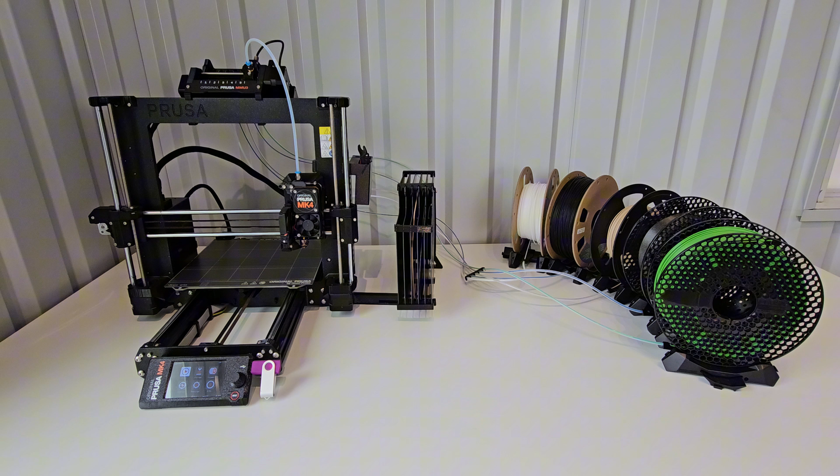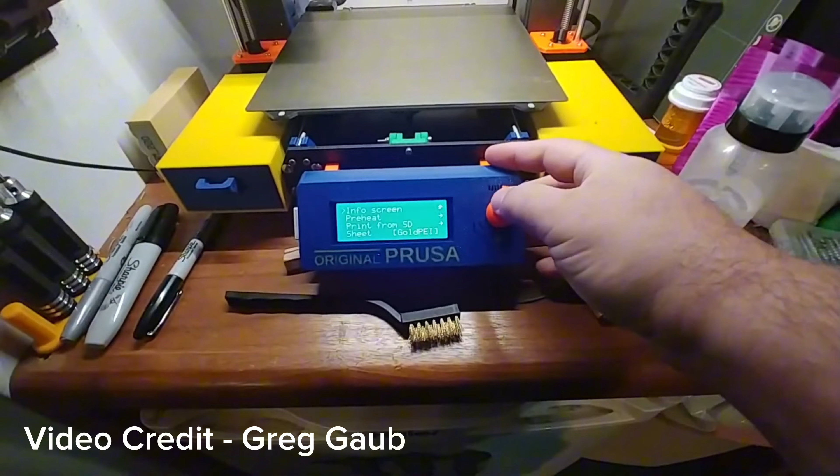Today I'll show you how I went from the gigantic footprint of the stock MMU3 to a much more compact design that's also a lot easier to load, by placing the spools above and having a different kind of filament bank behind. A subscriber sent a link to a YouTube video showing this setup for an MMU2, and I decided it would work similarly for an MMU3. I wanted to try this since it's easier to load, and I won't have to worry about spring-loaded retract spool holders.

The original design is on Thingiverse by TN Dave, and most of the parts are printable. There is also going to be some hardware required.

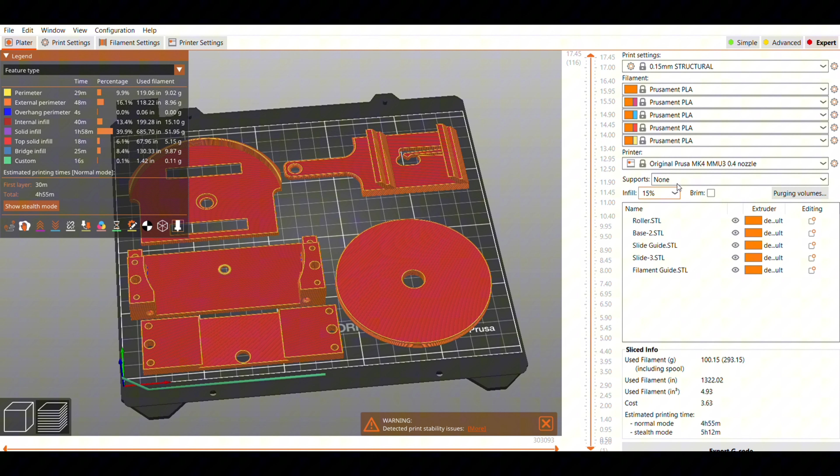So I downloaded all of the parts and arranged them as he recommended. Most pieces can be printed on one build plate at once, so I ran this on my MMU3 to upgrade my MMU3, and as he recommended, I did 15% infill with gyroid pattern. I'll have to print 5 of these, and they're a little under 5 hours each.

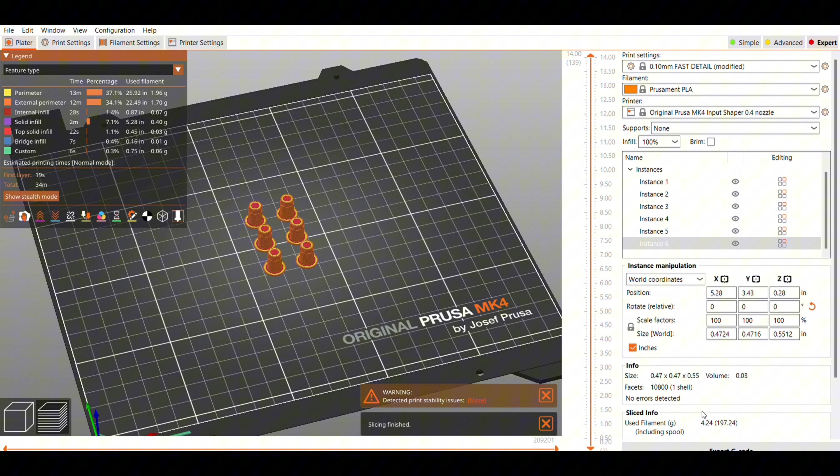There's also a filament guide, which I printed all 5 at once, and the bearing retainer, which he recommends printing at 100% infill. Of course he was running this on an MK3, so we'll see how it does on an MK4.

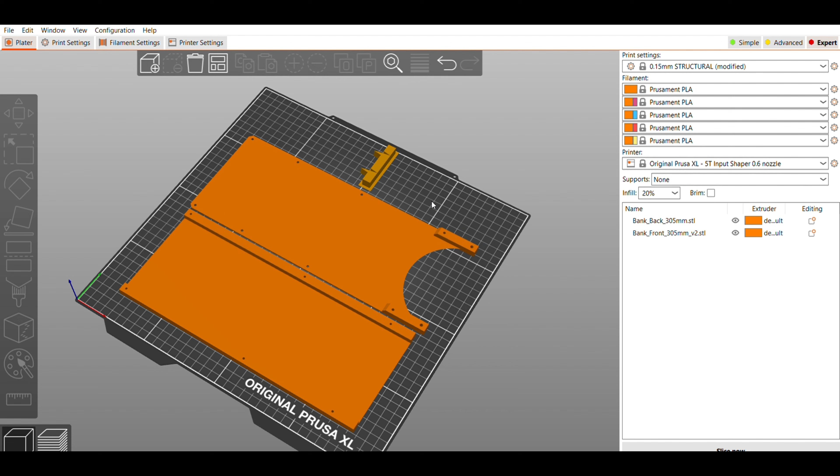There are several different sizes. I went with the largest size because with my Prusa XL, I'll be able to print it. If not, you can print the smaller size on your MK3 or 4, and the filament will just stick out the top a little bit, but there is room for that.

I was hoping I'd be able to print 3 parts at once on the XL, but after trying to arrange them, I realized I'm only going to be able to print 2 parts, so I printed the front and the back for each set.

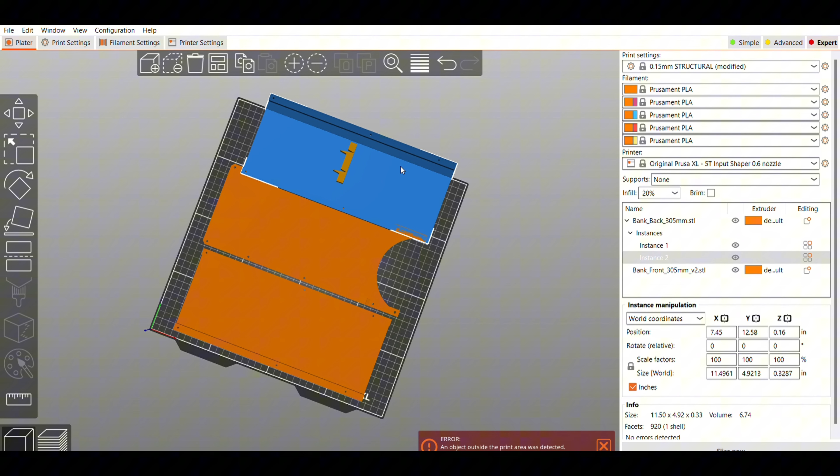This will take about 5 hours for each set as well, and I'm going to run the Prusament Galaxy Black for all the pieces, and I also have some Prusa recycled filament in a 2 kilogram spool.

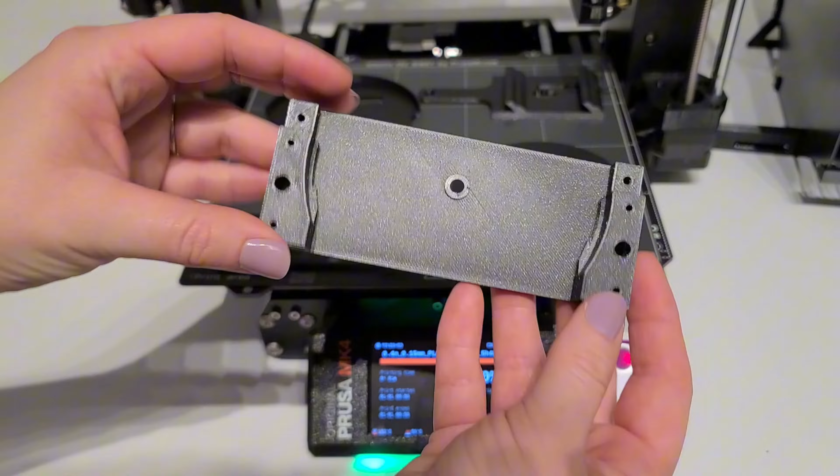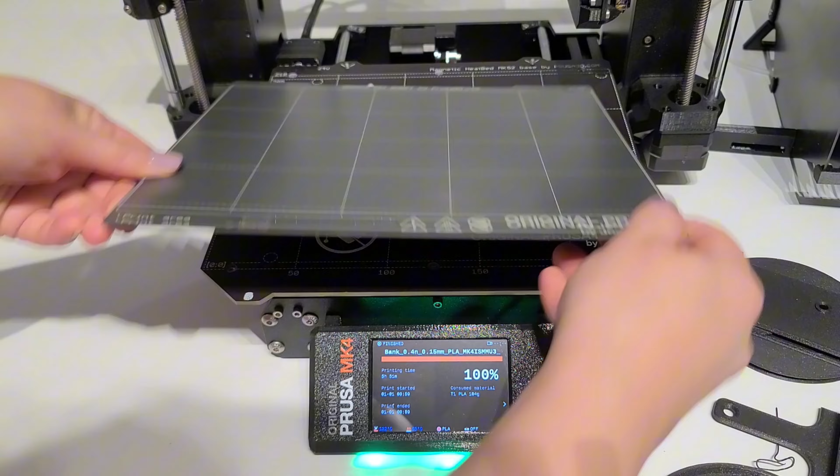The prints went fine on the MK4, all of these pieces here. I did think about printing on the XL, but I'm still running the 0.6 nozzle, so I was a little nervous the tolerances wouldn't be the same. So I just ran all of these on the MK4 over and over again.

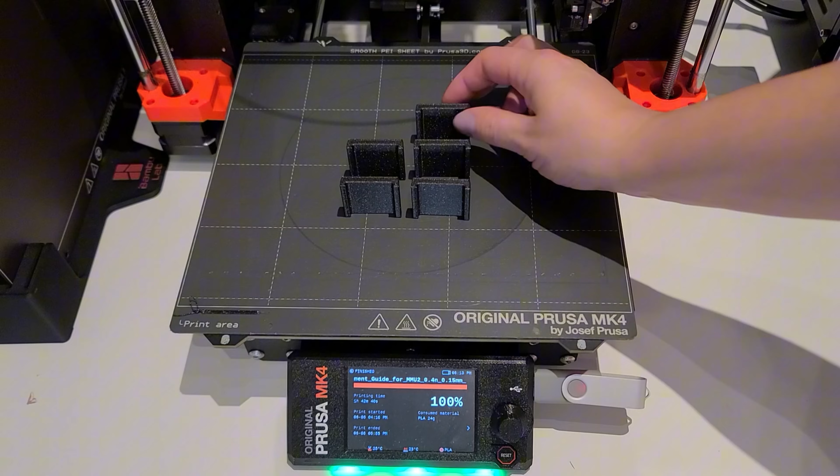But I am going to print the filament bank guide — that's the gigantic piece — on the XL, using this 2 kilogram of recycled filament. These pieces also printed quickly and completely fine in the Galaxy Black.

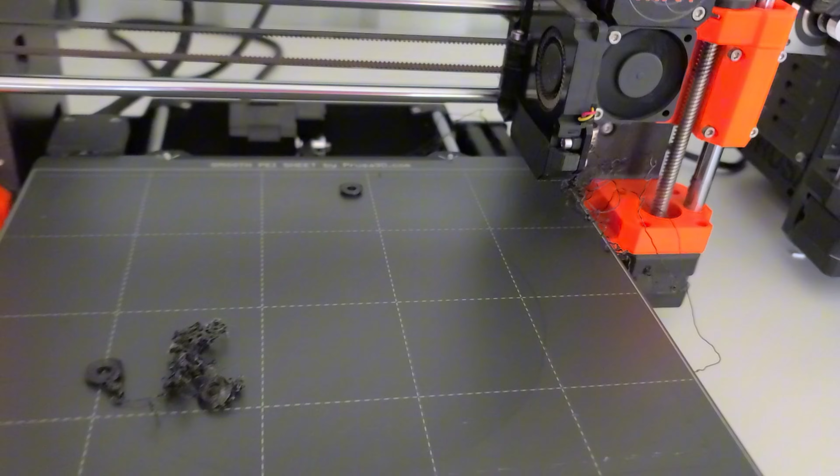But when I got to the bearing retainer, I had some issues. I printed with and without input shaper, and kept coming back to pieces not sticking to the bed, and a mess. So I decided to run it on the Bambu, and that finished out okay.

Okay, so I've got a big box of multiple things that I've ordered on Amazon for all the parts and pieces. Let me go through them one at a time.

So I've got the pan head self-tapping screws. This is an assortment. I did try to get everything in black because I printed everything in Galaxy Black, so I really wanted to see if I could get all the hardware black if possible.

I have 3 sets of the pneumatic push connectors. These are going to attach the tube for the filament on 2 sides, so I needed at least 10. I was feeling like I might need more, so I went ahead and got 3 packages of them.

Then I've got a large assortment of flat head screws. The other ones were self-tapping, these are not. So, screws, bolts, kit.

Okay, and then I needed some more drill bits. This one is a metric set, and this one is a center drill set. I think I just need one from each of those, but I wanted to make sure I had everything.

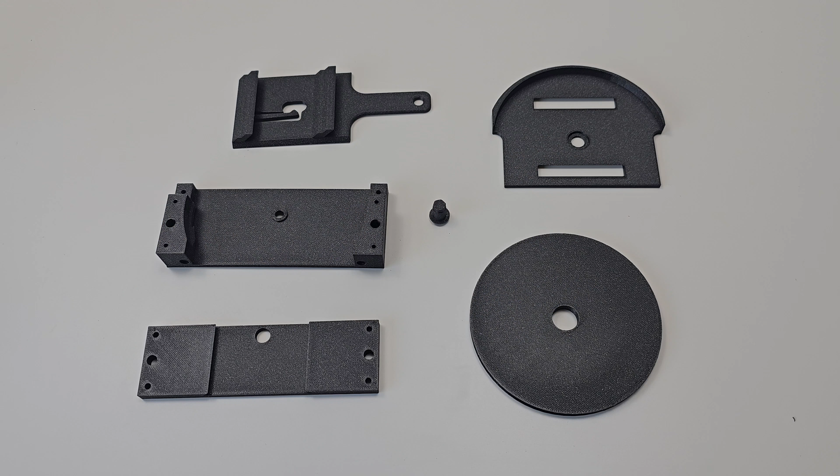And then the last thing that came in that I was waiting for forever is the ball bearings. I don't think that if I pulled apart the buffer these would be the right size, so I did order these as well just to make sure I had everything. I probably went overboard on all the different things I purchased, but I didn't want to be held up by not having the exact right size of screw or not having enough of them. So I wanted to be able to just knock this out quickly.

Okay, so we have one set ready. There's 5 pieces that I'll print on one build plate, and then the bearing retainer. All of those for one set.

The first step is to clean out the filament holes on this piece with a 2mm or number 47 drill. It says to be careful to keep straight with the printed hole, so it's going to be this and this. You can see through them a little bit, but there's almost like a little bit of a lip in there, so we need to clean that out so the filament can go through.

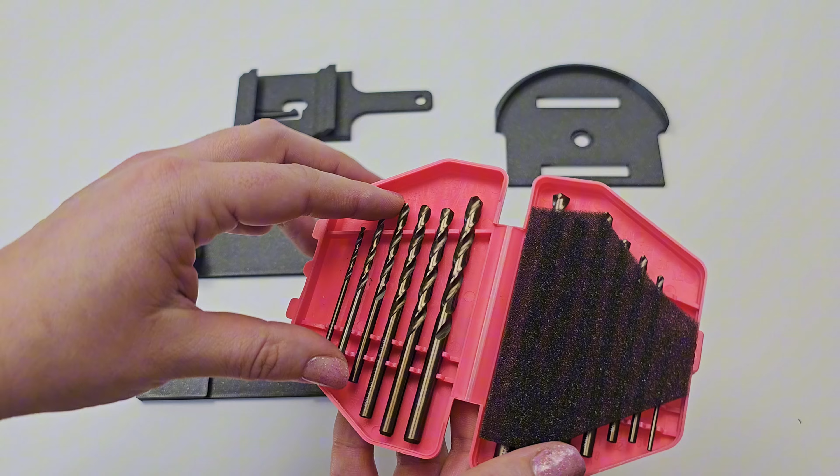So with my metric drill bits, I'm looking for the number 2. I think I'm going to take the smaller drill bit and see if I can clean it out a little bit that way.

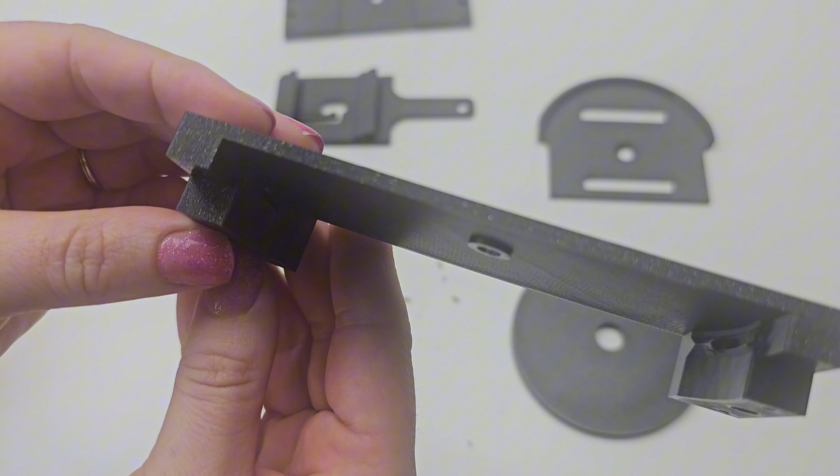I know that I am drilling a little bit through, maybe more than it seems like it should, but the filament does need to load all the way through there. So I'm going to grab filament and see if it will load.

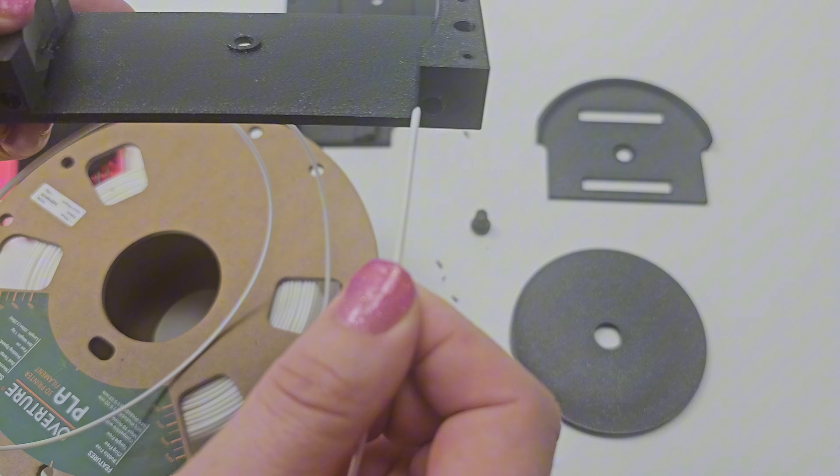Okay, that looks good, and this side too. I just want to make sure at this point that it goes through, because it's a little harder to drill these holes later.

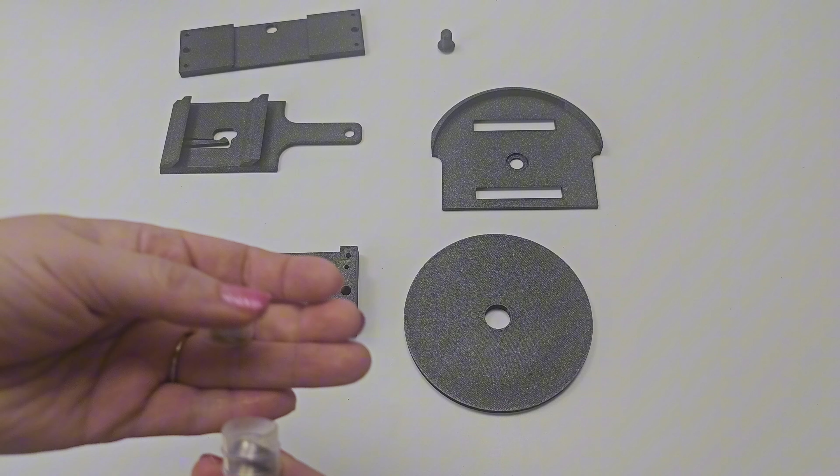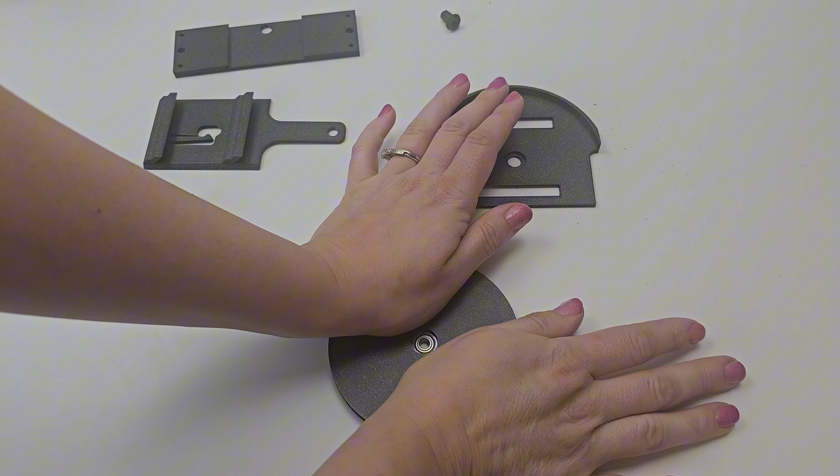So the next step is to take the roller and add the bearing into it. It is kind of tight, so I'm just going to really force it in there. And once I have it kind of jammed in smoothly, I can push it the rest of the way so that it's flush on both sides.

Okay, and then I'm going to take this and put it into here. Now there are some notches - from this side you'll see just a little bit of a triangular shape, and from this side there's actually 2 notches, one here and one here.

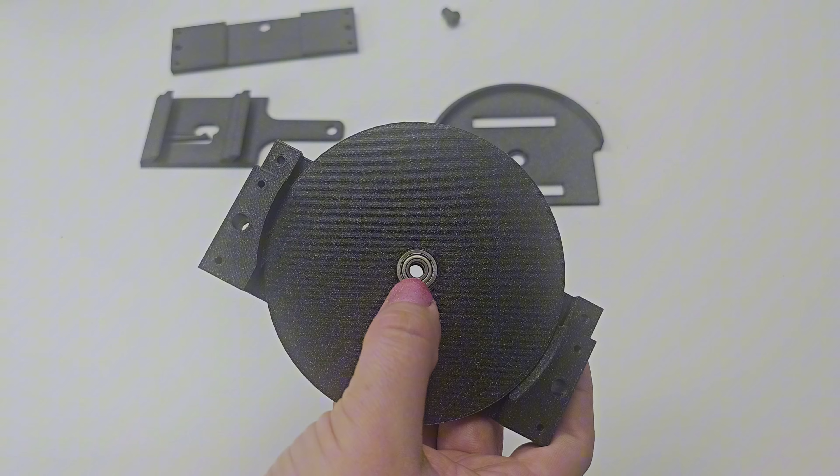You want to have both of them slide in between this opening. This is kind of raised, so you can use that as your guide, but you do need to get both sides to slip in. You can see on this side both of those are in, and both of those are in on this side. From this side, you can see that little triangle shape is inside. And of course we need to make sure it's slipped in enough that the opening is there.

Then we can set the bearing retainer here, and we need an M5 by 12 flathead screw. So in here, I've got M5 by 12, it's 3 over - 1, 2, 3. We just need 1.

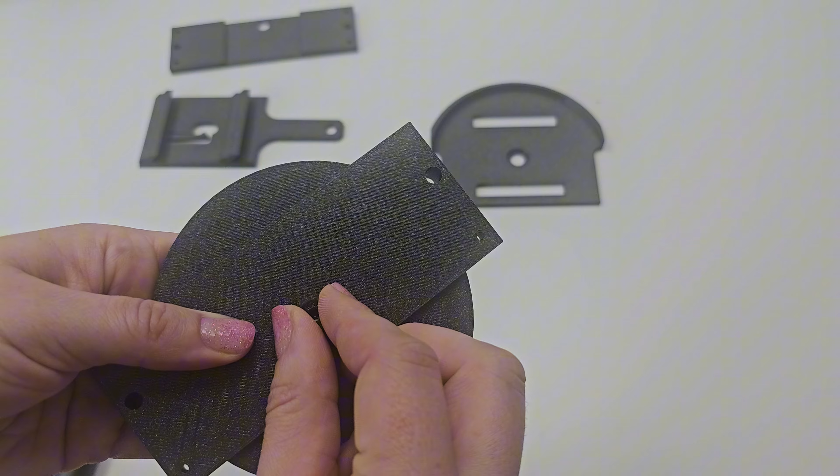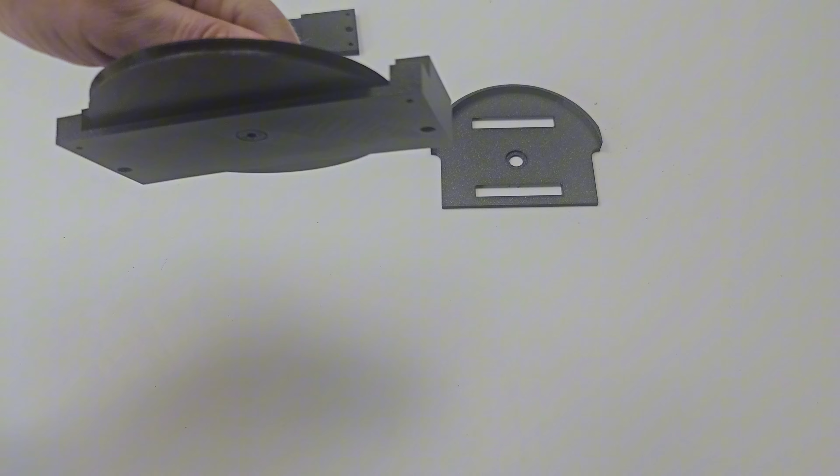Okay, and you can see from it spinning around that it spins easily. This needs to move freely, and you may have to just spin it a few times to get it to slide around how it needs. It works its way in there a little bit, but now it's moving freely.

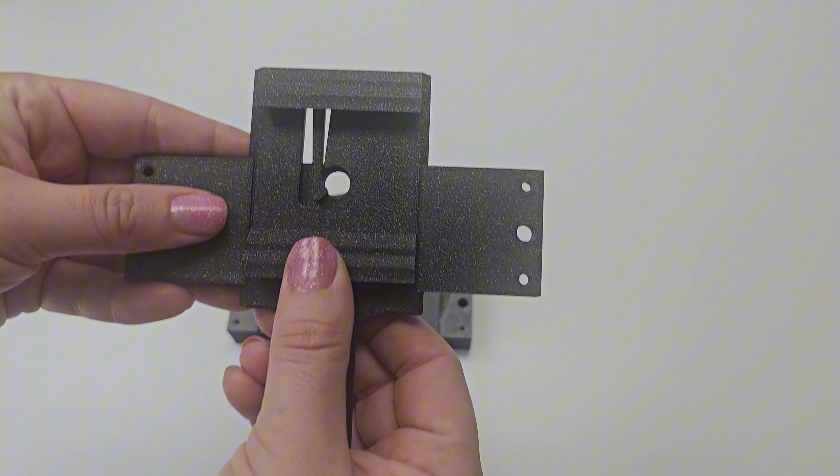We're going to take the filament load guide, which is this one with just kind of the round shape, and we need to flip it this way and set it on the bearing retainer. Then take both these parts and have this one with the hole facing up, slide this one on until they overlap, and this does need to move freely.

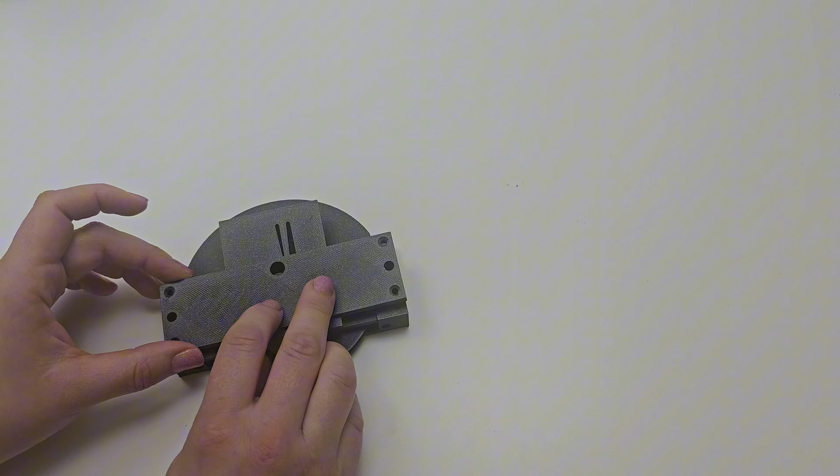And then these are going to go in the notches here. So we're going to set them, flip it over, make sure we go over the bearing, and that this can move freely. So from the side, if I hold it in place, you can see that this moves forward and backward.

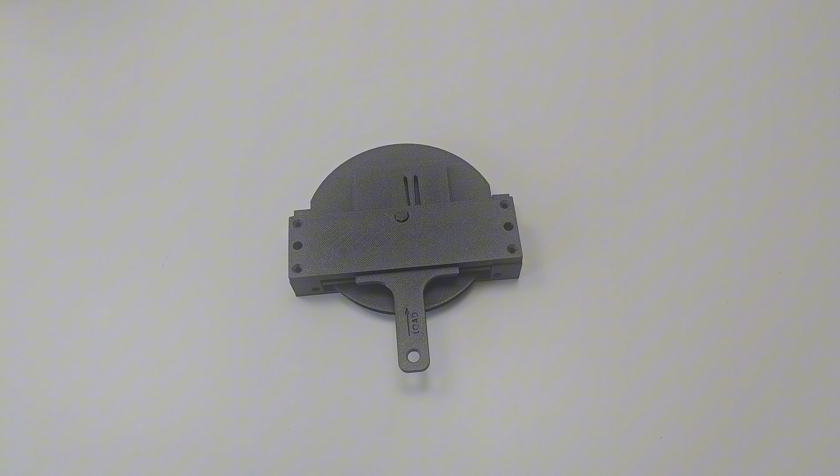So now we need to attach these two together with 4 M3 by 8 flathead screws.

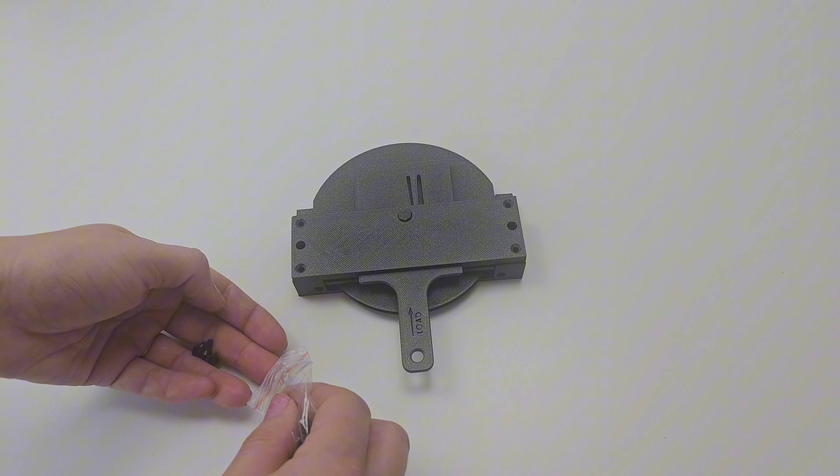Okay, so everything is sitting flush. Everything still moves. I'm gonna have to flip this around a little bit to get it to move freely again, but yeah, it's going good.

Now we're going to attach this to the filament bank, and you can either make the acrylic one as he shows, or you can go with the 3D printed one that I did. I did make the largest one.

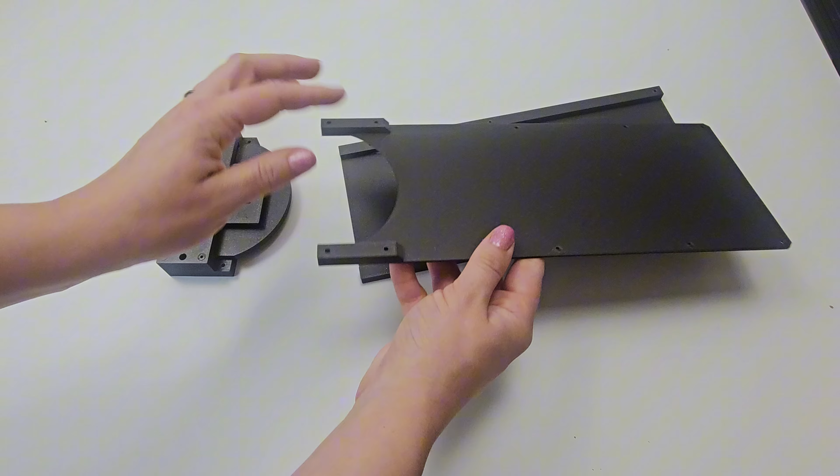Okay, so we can attach it together, and we need to have the notches up, overlap each other, make sure that the screw holes line up. I did notice that there's 4 openings on the sides and only 3 on the back, so it looks like this one is not going to line up unless maybe we feel like doing the self-tapping screws, but we'll see.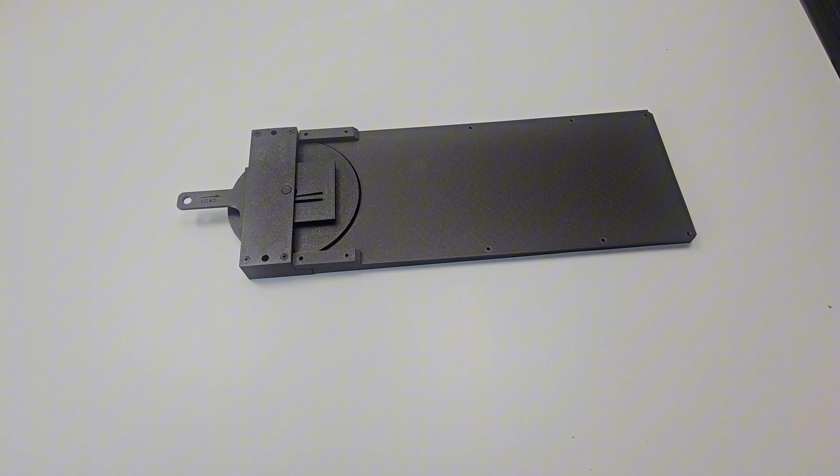So we're going to set these together and they'll overlap. And then we can attach them together using M3x16 screws. Let's see, up these 2.

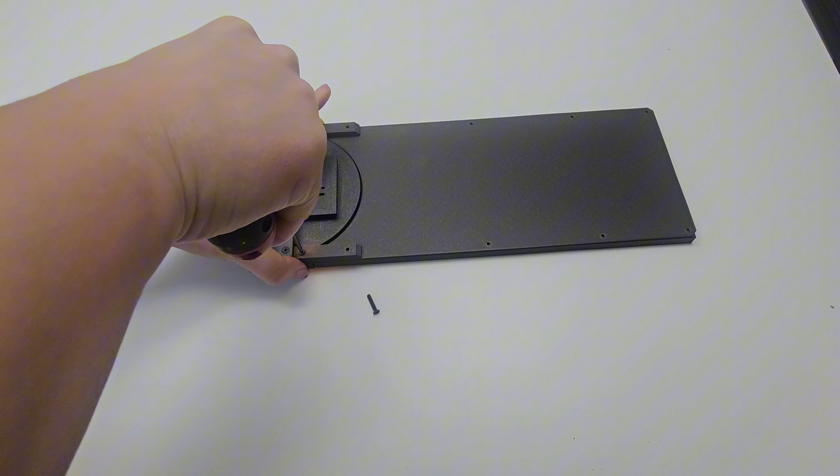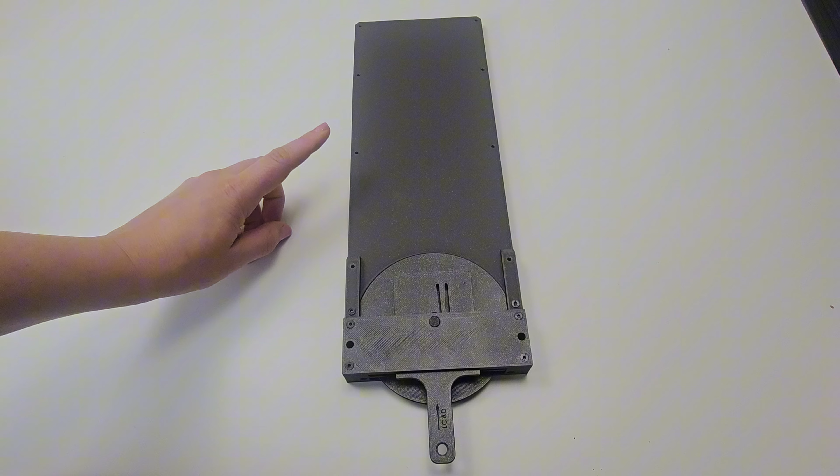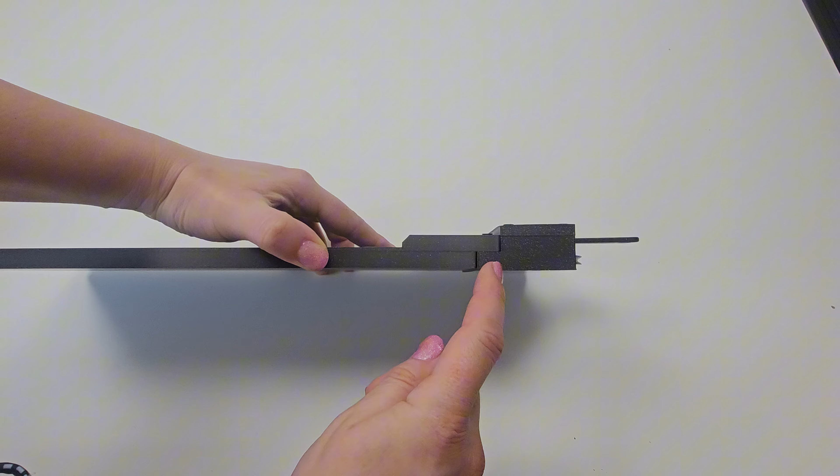Okay, now this filament bank is a different file, and he just says to use M3 screws to attach these together. I really could probably use the same M3x16 here, but they're just a little bit tight, and this is threaded, this is not, and I don't have self-tapping screws in that size, so I may just do like M3x12 or something a little smaller. The next size down that I have is M3x12.

Let me try those and see if they'll catch, but also not be too difficult to do either. I feel like this is going to slip around a little bit, so I may do these other screws a little bit, because this I think I'm just going to be drilling.

So for these ones, I'm going to use the self-tapping, and the largest self-tapping ones that I have is M3x6. So we'll see, this is a really thin top piece, so we'll see if I can get those to work. I'll need 4. And then maybe I'll do the 2 there. I'm not really sure why those don't have the holes.

But I'll at least secure it all together first. I can use a little there. Just a little more.

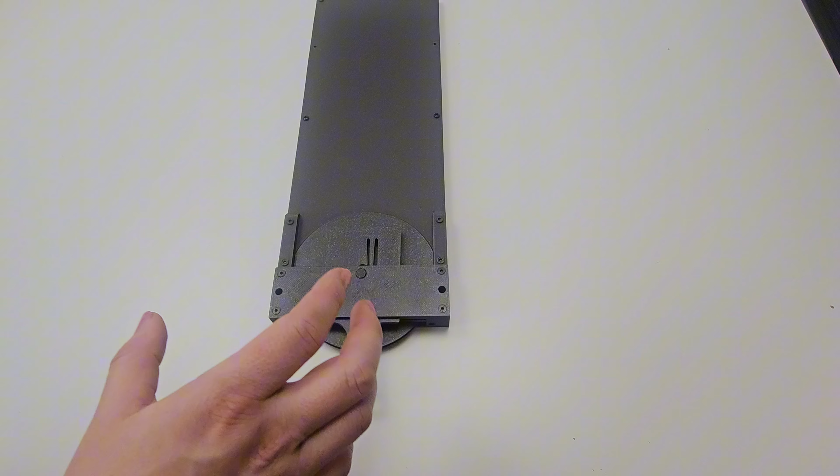Okay, so those are attached. I'm still trying to decide if I want to put screws there. This moves freely. This still spins. And so the next thing is going to be adding the tube attachments, tube fittings.

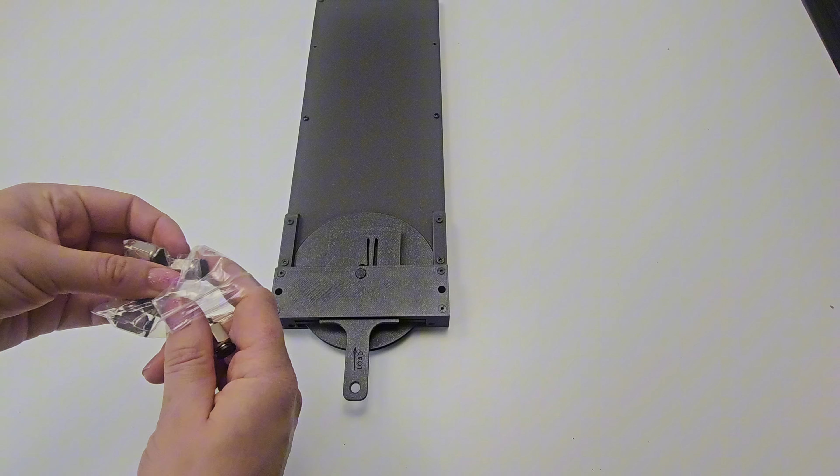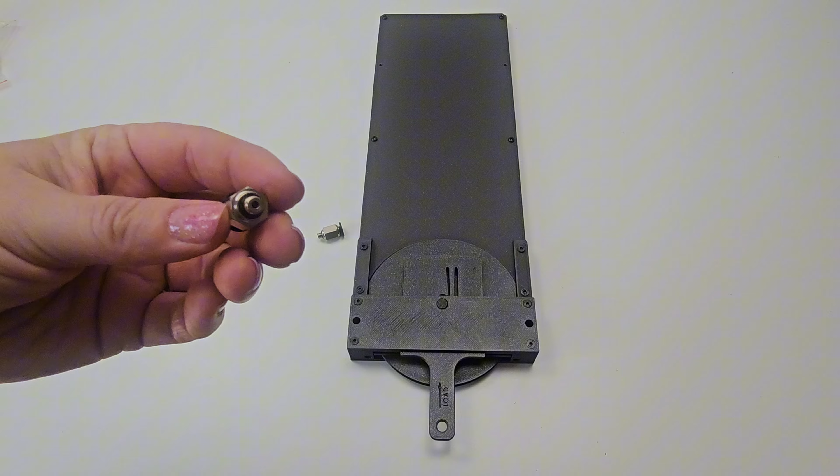So he does talk about chamfering the tube fittings. So I need 2 for now. Okay, so I need to get the smallest drill bit. I have 1 to 5, and so I'm going to grab the number 1. And on this side, the metal side is where we're going to do the chamfer.

Make quite a little mess. So this one is the one that's chamfered. Well, let me start with the stock one. This one is the stock. It's flat, and it's kind of a little bit smaller hole. This one has been chamfered. You can see that it's got the little bit of slope in it, and the opening is just a little bit bigger.

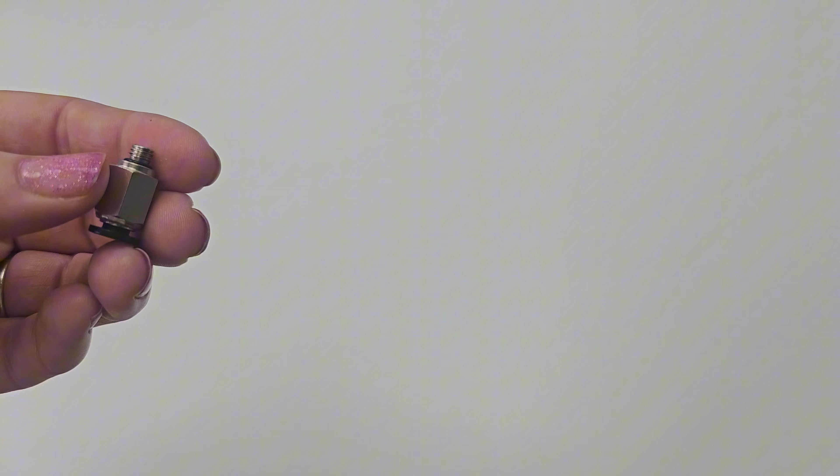Makes a mess, but anything to make the filament easier to load and for things to work more smoothly. Also, I would recommend when you're already going through and chamfering these to also use the number 1 drill bit and drill through the whole thing. The reason for that is that the filament goes through fine.

I checked it every step of the way that it goes through, but I noticed once the filament is unloaded, so after it's been in the extruder and it's gotten a little bit almost fatter here and had the stamped end, that does not want to unload. So once you've loaded all the filament through, you want to change the color, and you have 3 different fittings to go through. Not only is it getting caught and difficult, like I could not get it to go through. And it was not just one color of filament.

I actually had that happen with multiple colors. So it goes through fine with just regular filament, but once it hits that end, it doesn't want to go through. So before you attach all of these fittings in place, what I would recommend is to take your drill bit and just widen that out just a little bit more inside the fitting. Drill all the way through, and that gives just a little bit more so that this filament can come through without getting caught. And it's a lot easier to do that now.

Right now, I have realized that after I've already installed everything, so I'm gonna have to take stuff off the wall and kind of clean it up that way. So I would recommend doing that at this step.

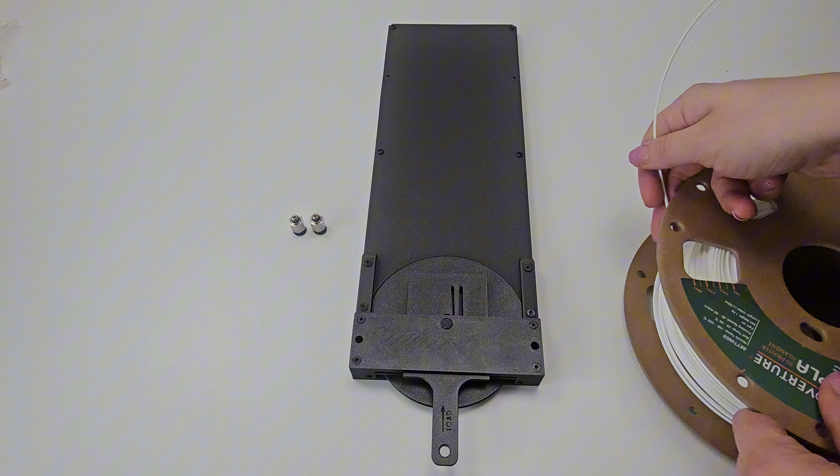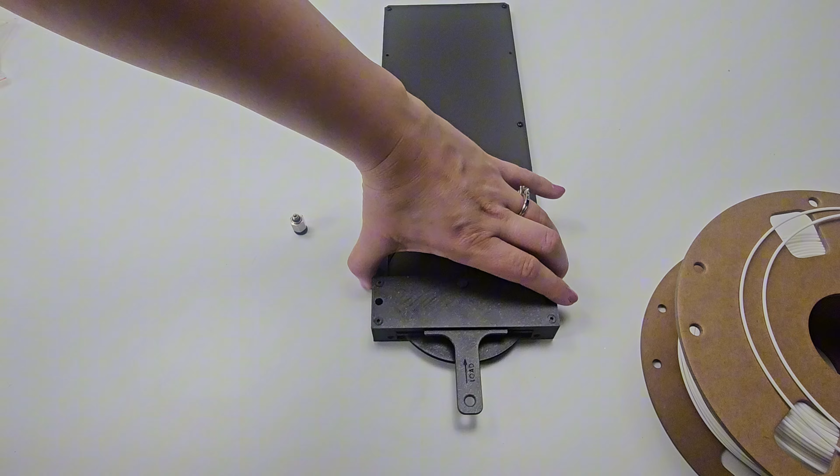Okay, so before I add the fittings, I want to make sure that everything is working correctly. So I'm just gonna run a little bit of filament through it and make sure that everything's doing what it needs to be doing. So let me just feed it in here, make sure it's in the closed position, and yes, that it comes out the other side. I'm not sure which side is which, but I just wanted to make sure that the openings are open enough for the filament.

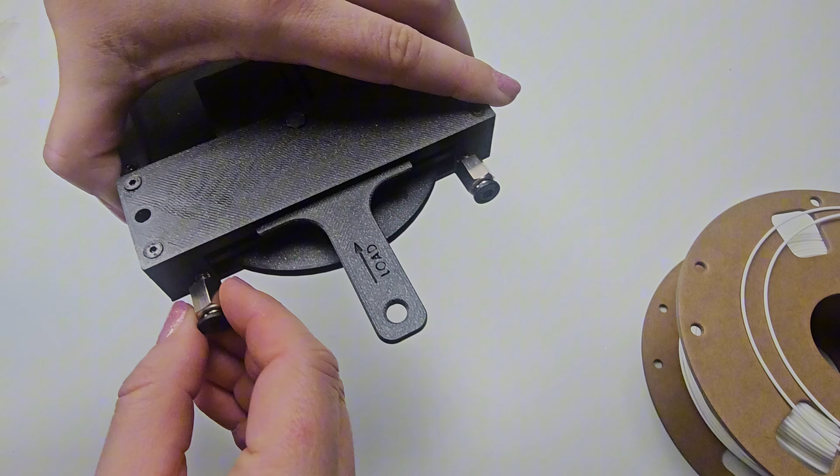Now that I've got the fittings on, I want to test them again before I add the tubes, to make sure that everything is still good. So I'm going to run it through this side, and it comes out the other side. So that should work.

I need to do 5 total, so 4 more. Okay, now I have all 5 of them ready to go.

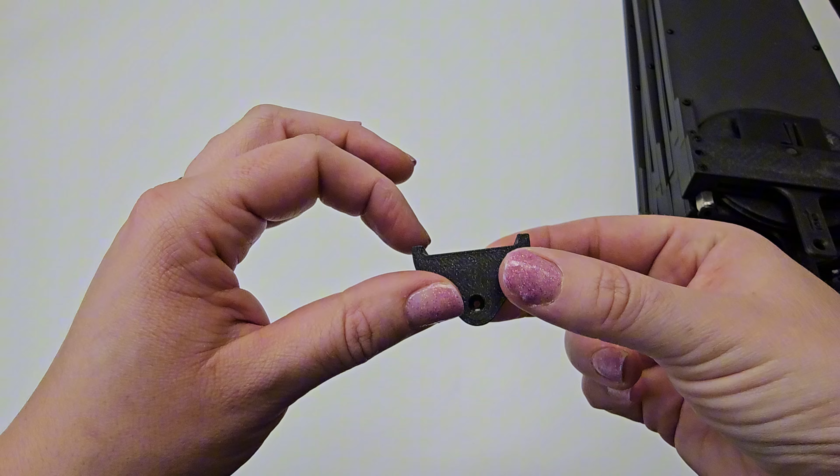I realized that the filament guide, this is the very first part of where the filament goes in. This hangs from the shelf, and the design looks like it was going to go on a wire rack shelf, and I have a solid IKEA shelf, and I'm not planning to drill or anything into it. I was actually planning to just use double stick tape of some sort, either Gorilla or Command strips or something. With the way that this is notched out, I'm not going to be able to use that. So I need to slice these last little bits off and just reprint them.

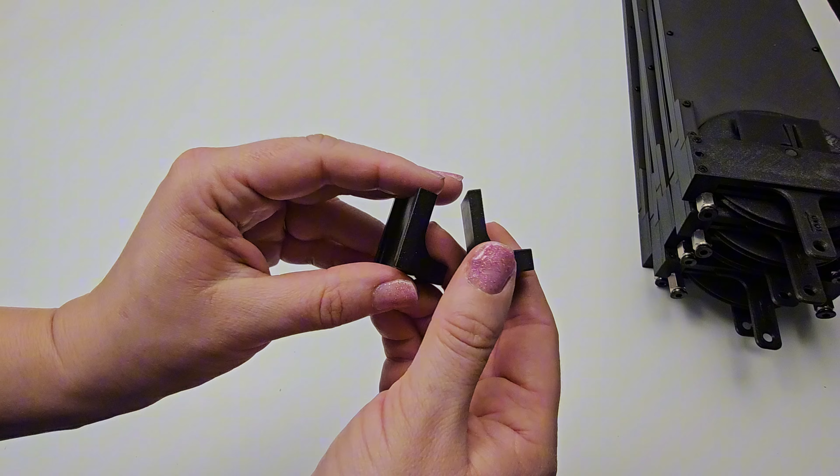And that worked out good. These are completely flat now. This was the previous part and the new part. So this will sit flush on the shelf. Then I also need to attach another tube fitting onto this, so I have 5 more of these to chamfer out.

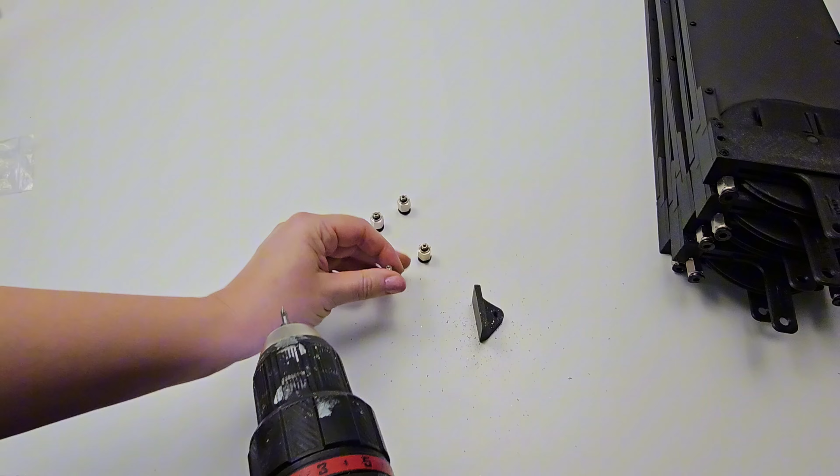It looks to me like the hole is a little bit smaller on this side, and then it looks threaded on this side. So let's attempt to put these in this way. I'll at least just get them attached enough, and I'll tighten them a little bit more later.

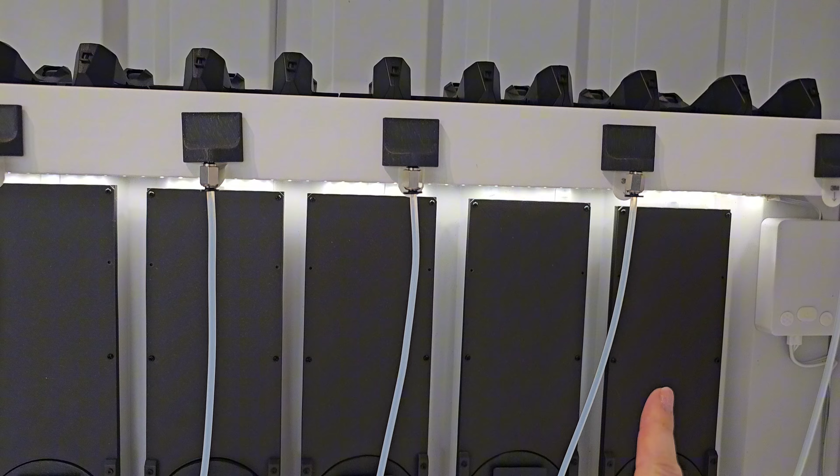Okay, this is partway through. I have the spool holders up here, filament guides, and the tubes into the filament banks. I decided to run them all in on the right. I didn't see any information on whether it matters which side. So on the left, now I'm going to run all of the tubes to the machine.

So now I need to set the machine in place and just run the last little bit of tubes. Okay, so now I've got the filament in place. The filament runs through the tube into the buffer, around, and into the back of the MMU3.

This is just really taking up, as far as on my desktop, the same space as the MK4 before. It is, of course, going quite a bit higher.

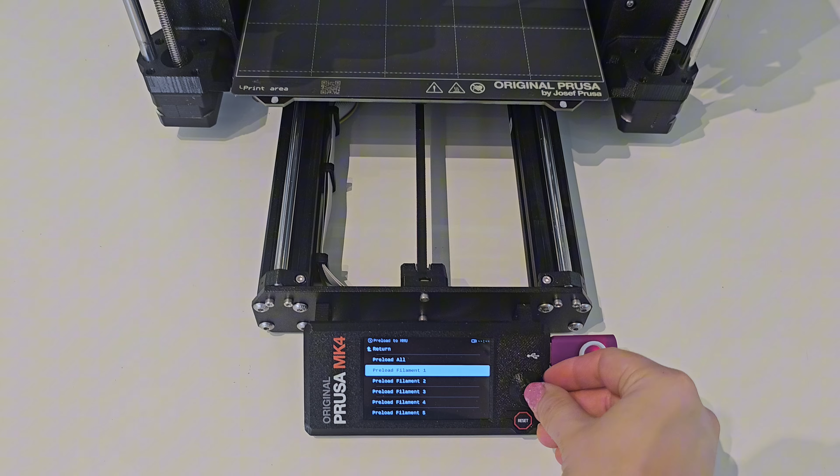The other thing that I really liked about this, rather than just moving the buffer from the side to the back or something like that, I didn't like that you had to push through and then manually grab and make that connection. So this actually will do it for you. If you have it in the closed position, it will make the loop, and when you open it, when the buffer kicks that amount back, it's going to just go into here. So it's not going to be trying to push it all back there or have anything tangled that way.

Now to load filament, I just need to go in and preload. Let's do the first one. Preload filament 1, and here it's starting to spin. So up here, I just have this one tucked in on the end. I'm just going to start loading it through the tube, and I already have this bank in the closed position, so it's just going to loop through.

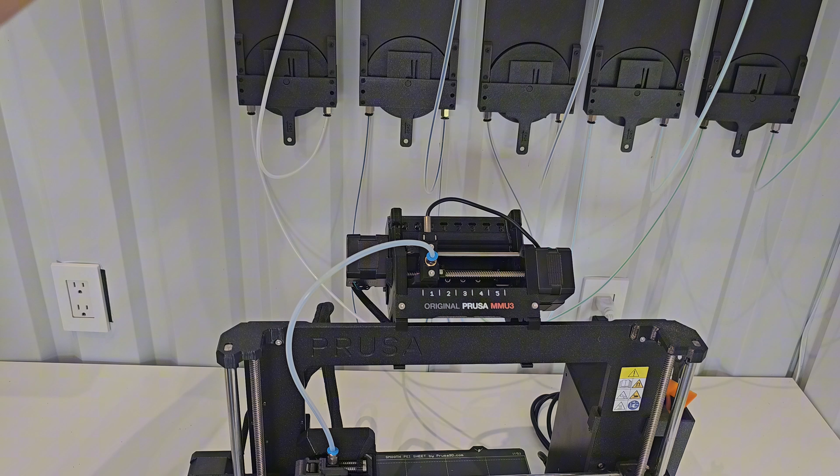It's just going to go from the tube up from the bank into the back of the MMU3, and it's going to catch. Okay, so it's finished. Really the only thing I have to do is just continually feed this through all the way to the machine, and once it catches, it loads. So it's a lot simpler.

I like having everything up above. Of course, this section here I had to kind of separate out because of the way that my metal walls are. That's the only flat spots that I had, but you can make that a lot slimmer as well, and having it behind the machine, even if you have another machine here, you can kind of overlap it. So I think this setup will work out really good.